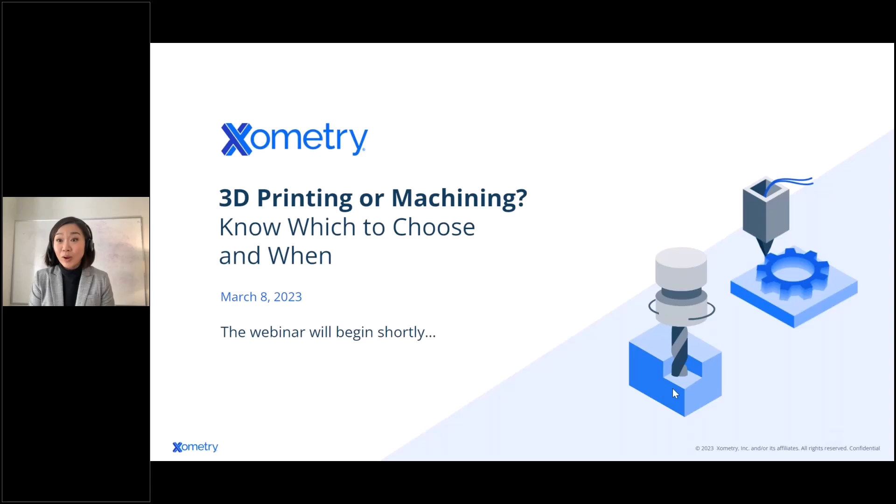We'll talk about 3D printing or machining, and let's go through our agenda. To start with, Greg and I will introduce ourselves, and then we'll talk just a little bit about Xometry, so you know where we got our expertise and experience. But we'll jump right in and give you an overview of CNC machining as well as 3D printing.

Between the two, Greg will give you some really interesting insights about subtractive versus additive manufacturing and the trade-offs of each. Then he's going to go through 3D design paradigm shifts, as he has over a decade of experience, and he'll tell you a little bit more about what has been introduced into the technology of material science and processing options.

We'll also talk about cost drivers, because some of you might be engineers, but some of you might be supply chain folks who have to watch your P&L closely, as well as optimizing your long tail spend. Then we're going to do a recap and a Q&A at the end.

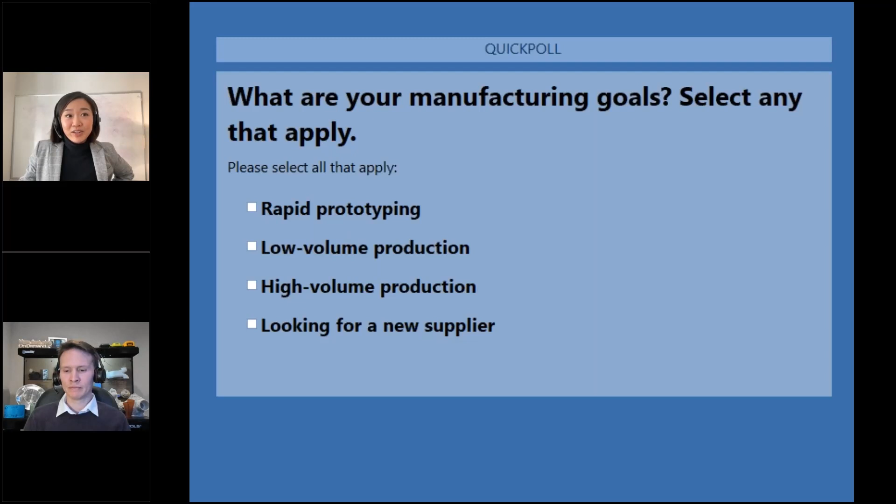It's great, over 70%. Over 75 now. Nice, perfect. So I'm going to show the results in 3, 2, 1.

Very interesting, Greg. Look at this. So 70% are looking into rapid prototyping and low volume production, about 25% on high volume production, and 21% looking for a new supplier.

No, that's awesome to hear, and it's something I always say: when you're working with these technologies, you can serve a customer of one. So a production, end-use production item can still be a low volume. I used to use an analogy when we talked about working in commercial flight, for instance. If you have one part on 100% of these commercial aircraft, you may still be making less than 500 pieces, but they absolutely need to be qualified. They absolutely need to hit the spec, and you need to check off all those boxes.

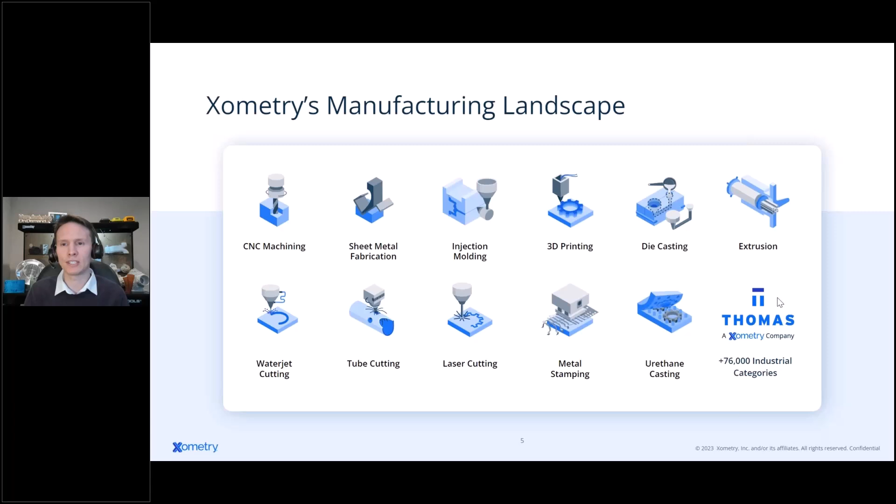So depending on what you're looking for, we have a lot of different solutions here at Xometry. And like I said, we are very manufacturing agnostic. Xometry offers about 20 different manufacturing processes. So when we're looking at different projects, we're able to think about not just what we have, because we have everything, but the strengths and trade-offs, what's going to bring the most project success.

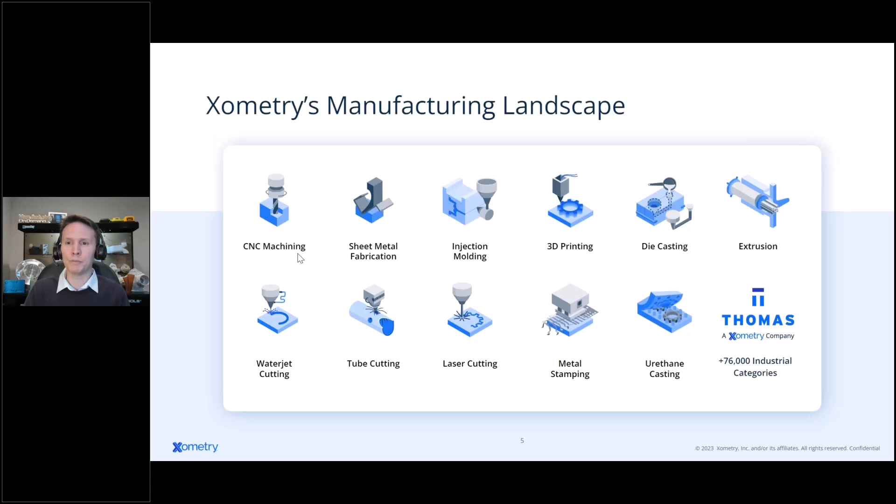Some of the highlights here, obviously today we only got an hour. We're going to be talking about CNC machining and 3D printing, narrowing down that scope. But we also have formative processes like sheet metal fabrication, injection molding, die casting, extrusion, as well as other ways to bridge that gap, whether it's laser and tube cutting or urethane casting. We have expertise, and we have a tremendously valuable tool to help you get that sourced readily and on time.

So let's just talk a little bit about Xometry. I'm going to go through this pretty quickly because we have so much content to cover today. But I do want to give you context on where we are and what makes us a little bit different than just a direct manufacturer.

Xometry is a digital manufacturing marketplace. We were founded in late 2013, really started making parts for our customers in 2014, and have grown and grown and grown since then. As a marketplace, we work both with buyers, those who need stuff made, as well as suppliers, those able to create those parts, whether it's a tool and die company, a 3D printing company, or machine shops. We have a platform that helps bridge that gap. We serve over 30,000 customers, and our global network, which started domestically but now has expanded globally, is over 10,000 suppliers.

Adding to that, a little over a year ago, Xometry actually acquired and brought in Thomasnet, which I've been very excited about because it helps fulfill this goal we have, where we want to be the first place you go to get something made. Because we have our direct offerings through Xometry's digital manufacturing marketplace, and we also have the Thomas listing, which adds a little bit more, maybe about 500,000 more suppliers, and over 76,000 manufacturing categories throughout that. So we just want to be a tremendous resource for you when it comes to manufacturing.

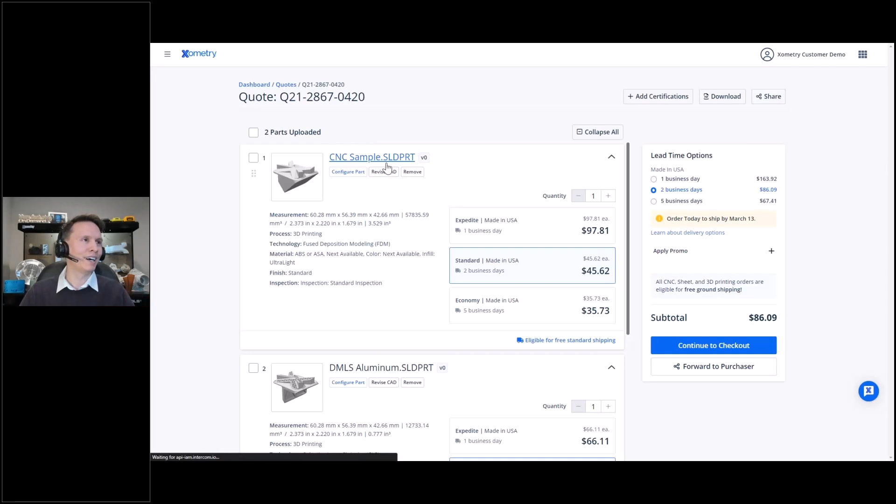In this case, I've added a couple parts here. It's defaulted to what it thinks these may be designed for, so it's pretty close, because one of these is going to have more complexity. So it's looking at selective laser sintering, which is a good value of that complexity plus cost, which is a 3D printing process. The CNC sample is going towards actually a 3D printing example because it could be either way.

But you can see here, I can quickly say, hey, let's take a look at this price for CNC machining. Again, this is live on Xometry's website. I can click, change my process in a click of a button. I can move to a variety of materials.

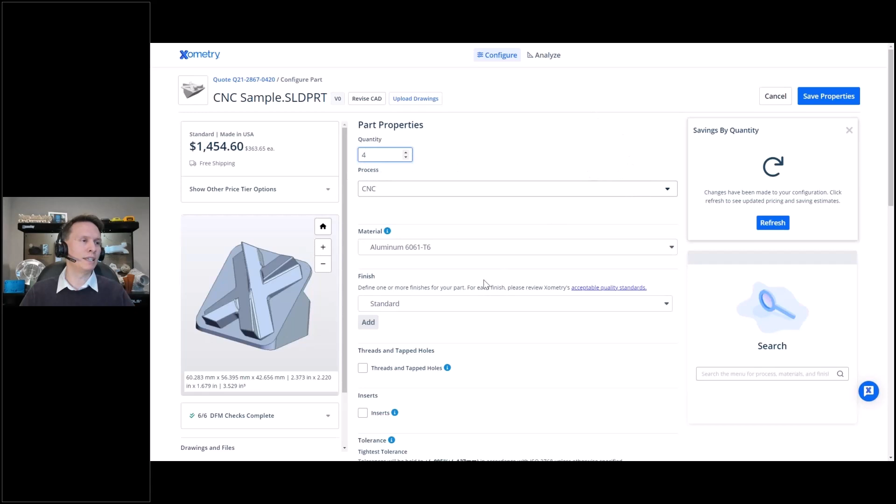You can see just how many materials we have offered here. And if you don't see what you're looking for, you can just click other and write it in, and our team will be able to look at it, review, and update that quote. You can see pricing and lead time update automatically as you're increasing your quantities and editing more features or finishes on your part.

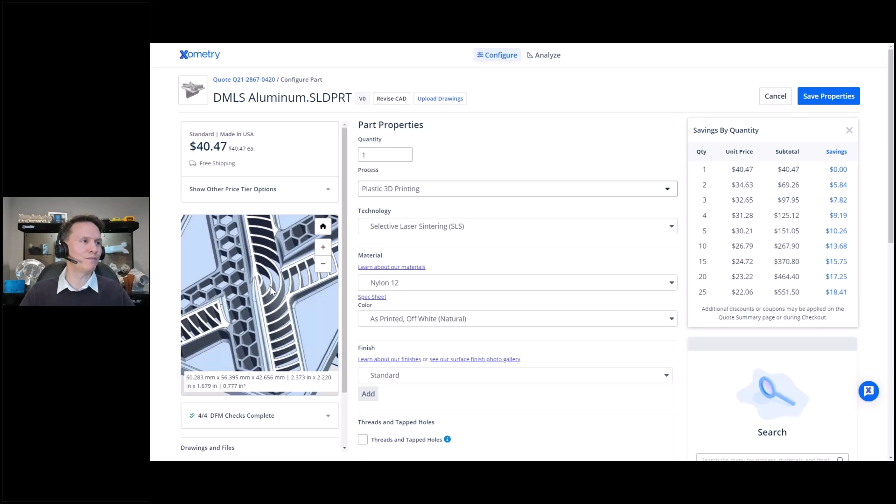The same thing goes for this one here, if I'm looking to move this to, for example, a 3D printed aluminum piece. I actually just printed out some of these pieces recently. They came out fantastic, but you can see some of these features, and we're going to talk about why I can 3D print those in just a moment.

I can move very quickly to a process like metal 3D printing, direct metal laser sintering, aluminum, and you're going to see that price bump, but that's something you get feedback right away with. So I really wanted to show you what that looks like when you're looking at the Instant Quoting Engine, and what we really mean by automating the procurement process, becoming the digital manufacturing marketplace.

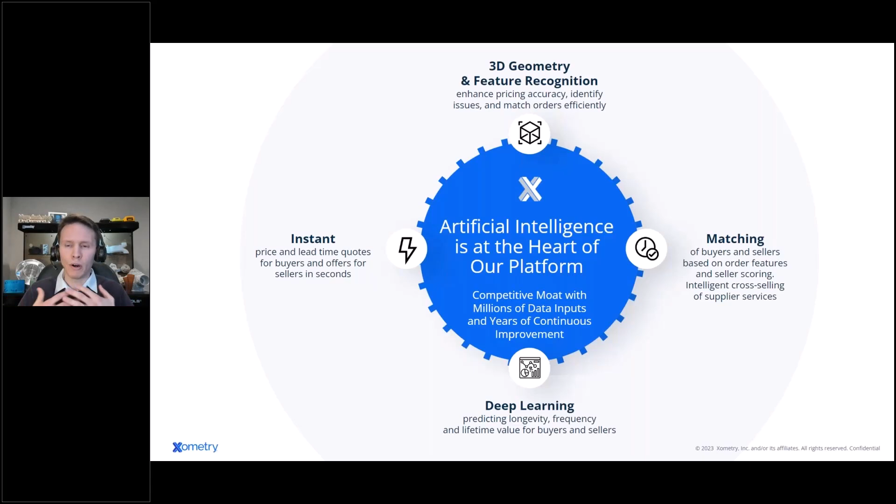We're able to bridge that gap, get you very quick quotes. We use 3D models to actually recognize features. And even as you set that project up, when you press buy, we use our vetted manufacturing network and use AI and machine learning to match make as well. So the heart of our platform is this AI and machine learning and deep learning tool that we have.

I'm going to take a break because now it's time to actually talk about CNC machining and 3D printing. So we're going to go into the bulk of this, and I really want to start with what we know, the stuff around us and these paradigms that we have, where you may not realize it or not, but you probably already have a paradigm in mind about what manufacturing is.

I'm reversing really quickly here because I did miss my slide. When I'm looking between CNC machining and 3D printing, these are the kind of top reasons I may go one design direction or another, and it has to do with those requirements. So we have those hard R's, requirements, and those soft D's, desirements. What's the requirement, what's the desirement as I'm producing my parts?

A lot of these have to do with the physical nature. So surface finishes, tolerances, how tight do I need measurement features and repeatability on my project? Cost is something that's huge and depends on the volume, the lead time, and other value factors.

Materials availability is a big one. The size of those parts, especially when we start talking 3D printing, you may find some limitations as you move up to a larger scale. And then throughput: how many do you need now, how many do you need each year? That may be a very different conversation when we talk about the choices we make between 3D printing and CNC machining.

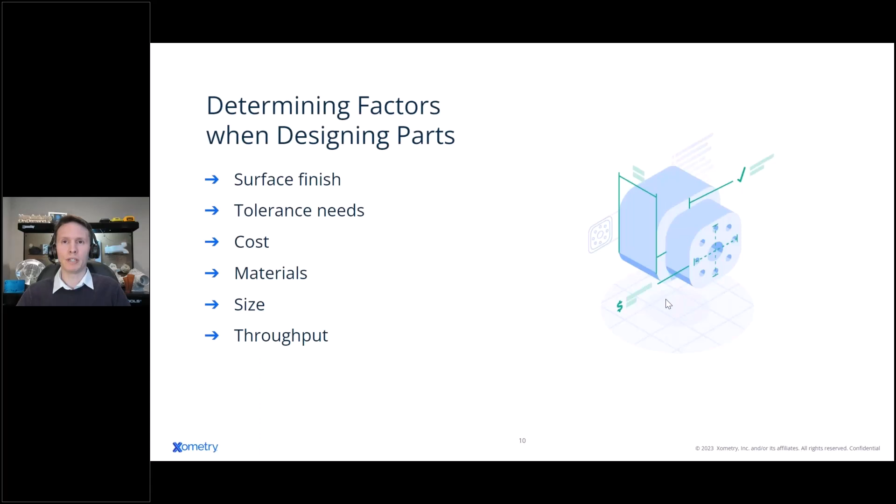So now let's talk about paradigms. If you look in front of you, if you look at your keyboard keys, if you look at the parts that you have—metal pieces, parts of your desk, doorknobs, etc.—they've probably all been produced in what I'm classifying as traditional manufacturing, or very close tertiary to that.

When we talk about traditional manufacturing, the base approach usually starts with something larger and then reduces it down to a final shape. So you're starting with a net blank of some sort and reducing it to the shape of the final part you're using. The most common example, and what we're going to discuss a lot today, is CNC machining—I have that net material and I'm removing it down using tools to reduce it to the final shape of my product.

And the stuff we see around us that's into high volume production, like injection mold parts and die cast metal pieces, they also fall in the same paradigm of subtractive, because the tools that made those things are also CNC machined.

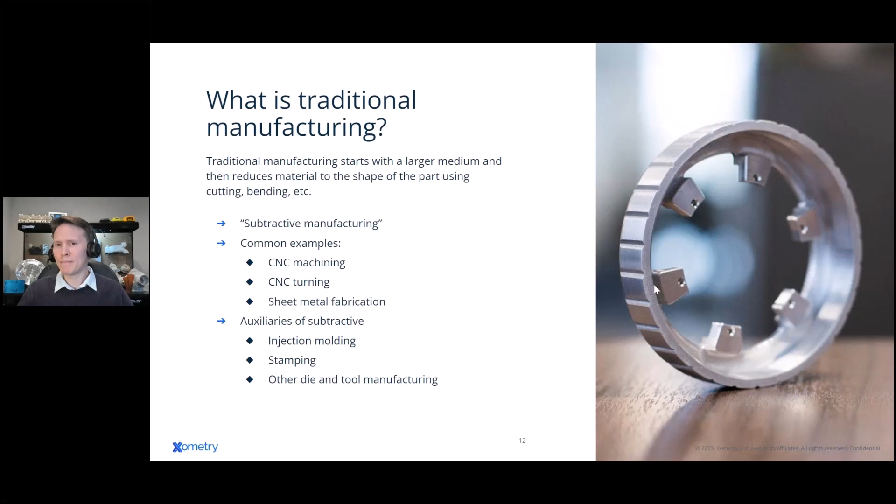What that means is we're kind of used to seeing certain aspects of CNC machining, and we may not even realize that that's our paradigm and that's our normal. That smooth surface finish from CNC machining comes from an end mill, a cutting tool, producing features of a part.

With a CNC machine, you are using a block of material, say it's aluminum or raw material. It is held inside this machine that can move that material around against an end mill, which typically has vertical movement in a 3-axis machine, but can also have secondary movements. That end mill is almost like a drill bit, and it can be a drill, but usually an end mill has a flat feature to it, able to cut on the side as well as cut down into your part.

As it plunges into the part, which may be moving underneath it, it creates features and pockets, edges, and other features on that part. As it's cutting, it leaves a pretty smooth surface finish, typically 125 microinches RA. When you look around the parts behind me, the CNC machine parts, it's something we expect because it's something we know. It's our paradigm of what a typical manufactured part looks like because it's been tried and true for such a long time. There are design considerations.

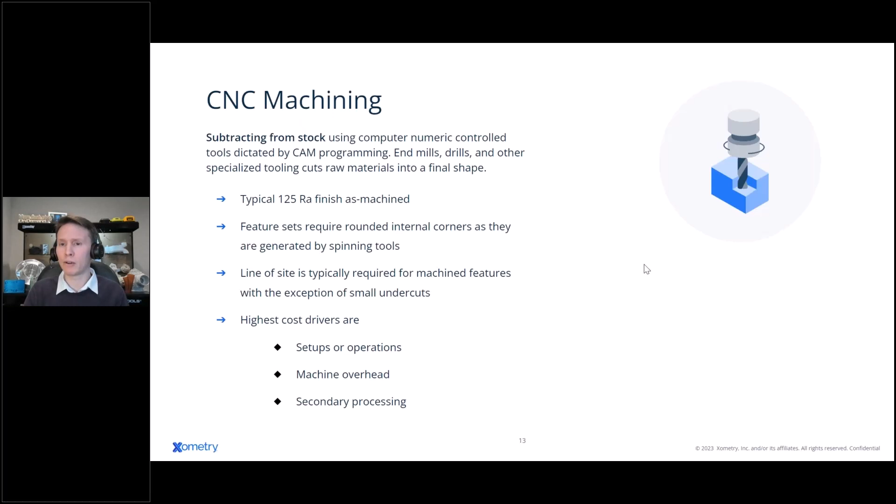Ultimately, CNC machining does have secondary processes to it. So if you need to add a finish like an anodize, a plating, chem film, or powder coat, all that can add incremental costs as well.

But like I said, it's what we know. CNC machining is pretty awesome. It is a tool that is highly versatile because we have gone to college about it. We have learned through generations and generations of practical knowledge and documentation, metallurgy, qualifications, ASTM standards around these materials and the processes used to make these machine components.

Also, I can do some things with the machine that are really cool, like I could stop and slow down and measure, doing in-process incremental changes to hit very tight tolerances on my part against a technical print or requirement. But that characterization of materials is just so important, because when I'm working on a machined part in industry, I don't even think twice about buying a certain material like 6061 from dozens of vendors, because we know that material has been so tried and true that as long as you're buying from a reputable vendor, you're going to get the same results every single time.

As an engineer, you may be just assuming the mechanical properties within that material, and then you're designing your shape around that, where it can be a little bit different with other manufacturing processes. But that established track record just works really well in machining's favor, and it brings consistency, reliability, and predictability that is very critical for a lot of industries.

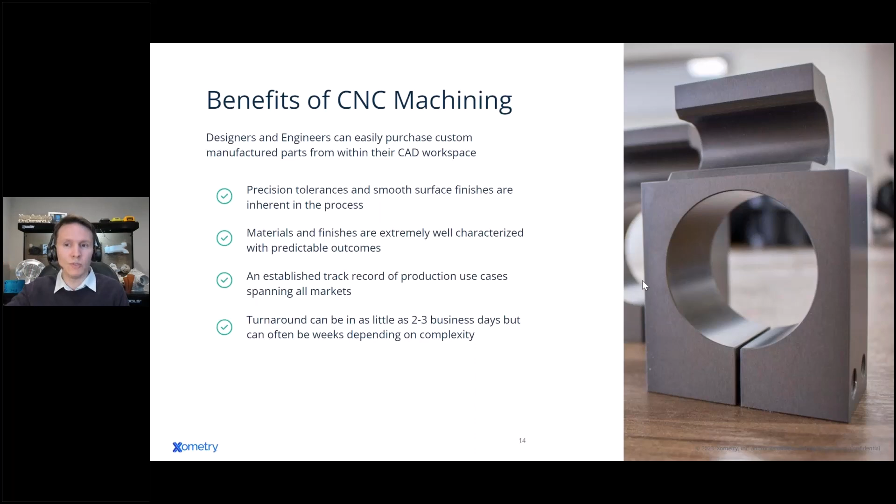And turnaround can be pretty quick. As a service, we usually start about 2 to 3 business days on smaller parts. If you're running internal, obviously you can push a little bit further. And then the more complex the part, the more finishes, the higher throughput needs, you see that movement into lead times into the weeks or so.

But if I'm a company like Phase 4 Aerospace, CNC machining may be exactly what I need. If I'm building micropropulsion units, parts that are designed for space flight, you really need to have a high level of confidence and predictability on the outcomes you have. There is no 'let's bring it to the repair later' moment when you launch something into space.

And this is exactly why a company like Phase 4 may have a hard requirement for machine components throughout their design. So in this case, they were working on a new electrical propulsion system. They chose Xometry because we were able to manufacture these parts to their specifications, including building a documentation chain from the traceability of that material all the way up to the manufacture and finishing of that material. We are also, as Xometry, ISO 9001 as well as AS 9100 certified for aerospace manufacturing, and we're able to extend that throughout our network to hit those requirements, as well as any security or certification needs.

But we help them cut their manufacturing costs by becoming a consolidated supply chain for these components, and hit all these specific needs that a company in high-end aerospace has, especially when they're doing a product launch where they need to move industry fast. So this new space industry just needs to keep on moving, keep on developing, and keep on pushing the limits. Machining helps take some of that guesswork away.

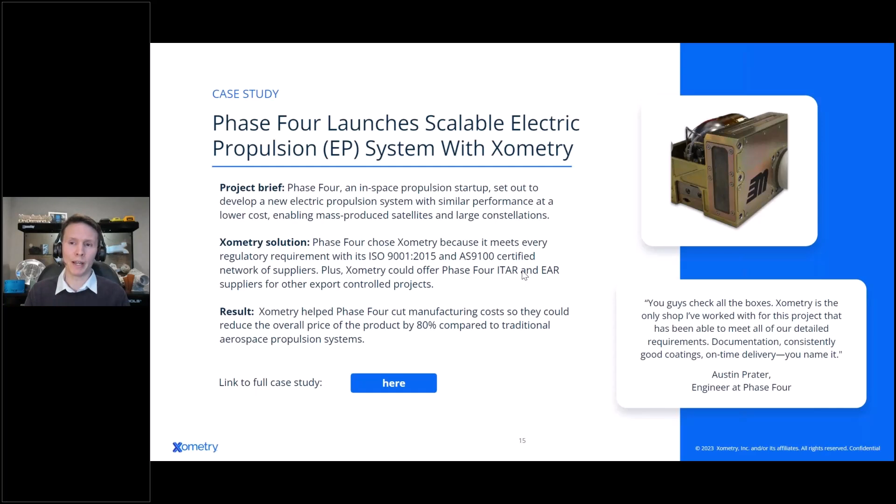Now, switching that around, machining is what we know. We have this idea of what a machine part looks like, should look like, and this idea of workmanship throughout it. But 3D printing is a little bit different. 3D printing or additive manufacturing is this process of growing parts. It's typically done layer by layer, and you're joining materials together, either fusing them with heat or a chemical reaction, or sometimes a secondary fusion process.

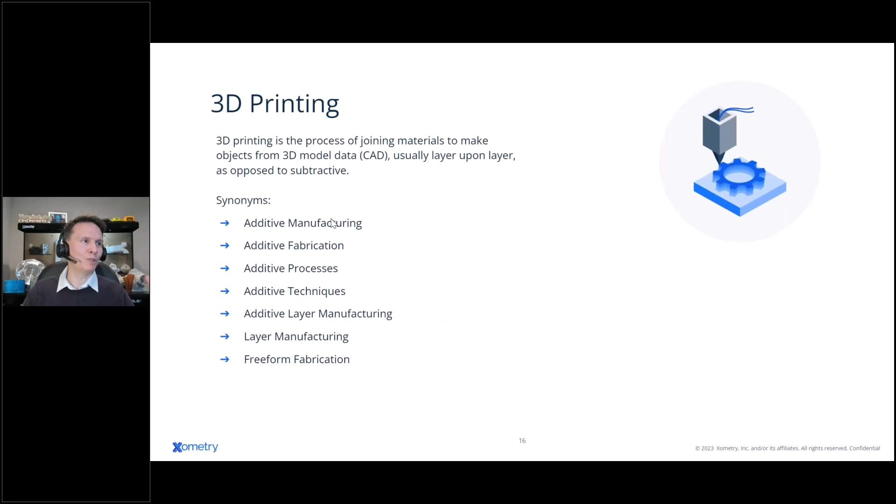And it's doing this all dictated based on a 3D CAD model. So unlike subtractive, where you're starting off with a chunk of stuff and reducing it down to the final shape, 3D printing starts with an amorphous material, a filament or powder or liquid, and it is fusing or curing it into the final shape, kind of growing from the bottom to the top. So it has a much more organic approach to manufacturing. I will say nowadays, mostly additive manufacturing and 3D printing are what we're using in the industry though.

But additive manufacturing is a landscape. It's not just one machine doing it all. We have different ways of making 3D printed parts, as well as different outcomes, so different material classes.

Xometry offers 8 unique additive manufacturing technologies and counting, including ways to make thermoplastic parts. So when I think thermoplastic, think about what you get out of injection molded materials, so nylons, ABSs, polycarbonates. We're able to print directly in those materials. So our top picks are going to be selective laser sintering and multi-jet fusion for their high versatility. FDM, fused deposition modeling, that's the one that uses that reel filament of material to produce parts. It's very good for those boutique builds. I need a green ABS part, or I need a white polycarbonate part, or a black Ultem part. You're able to just specifically say that's what I need and print in that.

We also have engineered thermosets, so these photopolymers that are liquid based.

Three technologies offered through here. So stereolithography, which is one of the oldest 3D printing methods, was invented in the mid-80s, and it's just developed and really skyrocketed from there. And by the way, we're seeing a photopolymer revolution right now in the industry, which is really exciting.

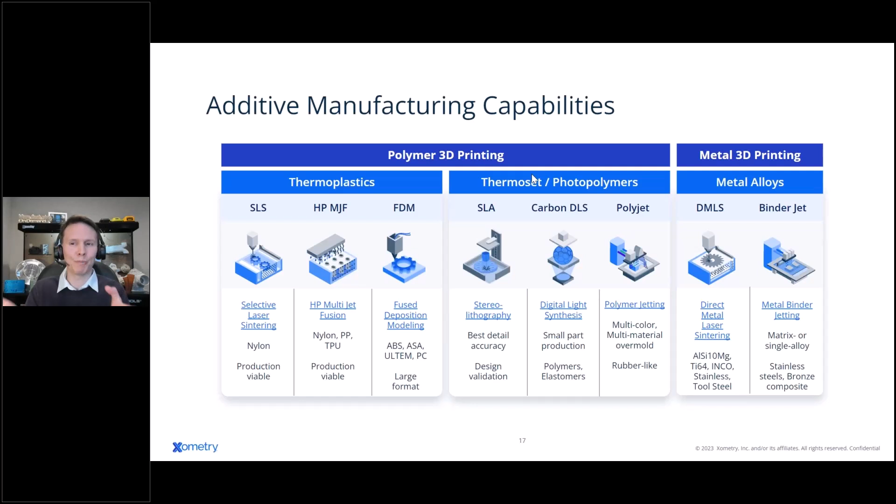Metal 3D printing, we have a couple options like direct metal laser sintering and binder jet metal. They are very different on how they're producing, but ultimately you get metal parts. Binder jet has some secondary post-furnace processes. It starts with a green shape held together with a glue binder, and then it has a secondary process where the part may shrink and move around a little bit, but it gives you more of an option for higher volume production than DMLS, where the parts are typically sintered to a build plate.

And all these processes are industrial. So industrial 3D printing is something that is designed to work in environments such as what we're doing with the service—we're always running these machines, they're always cranking out parts. They need to be very reliable and very repeatable for someone like you, who could be a customer, where you're ordering a part today, and then say you want to order 30 or 300 three months from now, you're going to have that high level of repeatability.

Hey, David asked a really good question—we're just chatting on the side. Greg, can you mix and match the 3D printing processes, or are they all separate?

Yeah, that's a great question. So these processes act independently, almost like a vertical in how they're actually manufacturing the parts. The base nature of how these parts are being created comes from the machine up. You can do things like multi-material 3D printing within PolyJet, for example, where you're mixing colors or different material properties in a matrix, so you could get kind of a simulated overmold or something like that.

But for example, if I'm doing an SLS nylon 3D print and I want to have some aluminum on that, that would be a post-assembly operation. You wouldn't necessarily have the capability to mix both of those together. There's a lot of reasons why—dissimilar materials science, the bonding, the heat and thermal properties of it, the machine characteristics can become very, very tricky there.

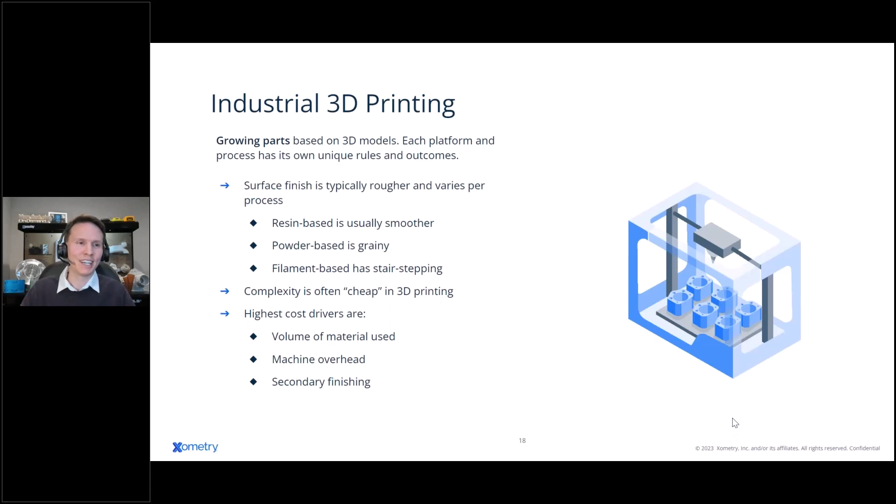That being said, when we're talking about the benefits of 3D printing, it really just wins the low volume game. It's such a powerful tool for rapid prototyping and low volume production, because that talent—we talked about CNC machining—that talent is in the operator. With 3D printing, a lot of the talent is in the machine.

What I mean is we have some really talented staff that are doing build setups and programming and that digital setup for 3D printers. But they're able to do that and scale up to dozens of machines per operator. So you could have a small nucleus of talent able to produce a lot of parts, thousands of parts per month, with build setups and this digital programming. It makes it very quick to add a digital file. Your build setup program is doing a lot of work for you and translating that information to the 3D printer, where the 3D printer is going to do its best to reproduce that shape using the process and its parameters.

You could have one-day turns with 3D printing, even on a service level. It's not uncommon for us to get an order and build it overnight, ship it out the next day. Even some of the more complex parts can only take a few business days to produce.

What's really great and unique about 3D printing is this function orientation. With CNC machining, if I have to pay for that spindle to turn around and mill out parts, I may be designing in a way just to reduce the amount of time that's working. So if I have a bracket, I may leave it quasi over-engineered—if I just need these functional features, I'm only going to reduce the material there and leave the rest in a block shape. With 3D printing, the work's only when it's depositing material, so I could put that part on a diet and instead talk about function first in my design.

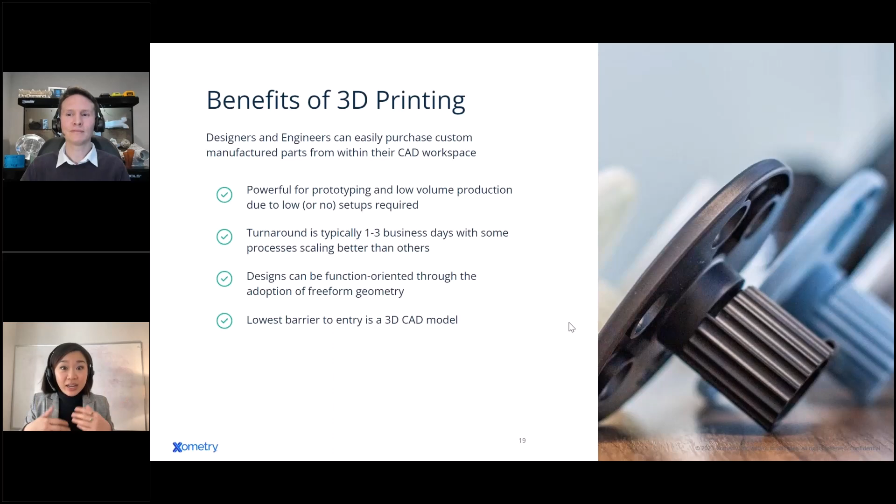No, absolutely. At Xometry, we do have expertise in manufacturing in-house as well as throughout our global network. By far, the vast majority of parts are done with our vetted partner and supplier network, and we rate them just as much, the same as we rate our internal capacity. So we do have some polymer 3D printing capacity and a nice little factory out closer to where I am, in the Gaithersburg, Maryland area. And a lot of our team comes from actually running our own facilities in the past, our own machine shops, molding services, tool and die services. So what's really great about Xometry as far as our staff goes is, we love this business. We are just so incredibly passionate about what we do and the parts that we make. And we're also able to work with our suppliers. They have their own vetting processes. We have partner success score and feedback, and we also want to have stake in the game with them. So if there's anything where we need a strategic approach to producing those parts or working through our troubleshooting, our team's first in line to help with outcomes and success there.

And speaking of that, I have this case study kind of showing where additive manufacturing plays a really nice role.

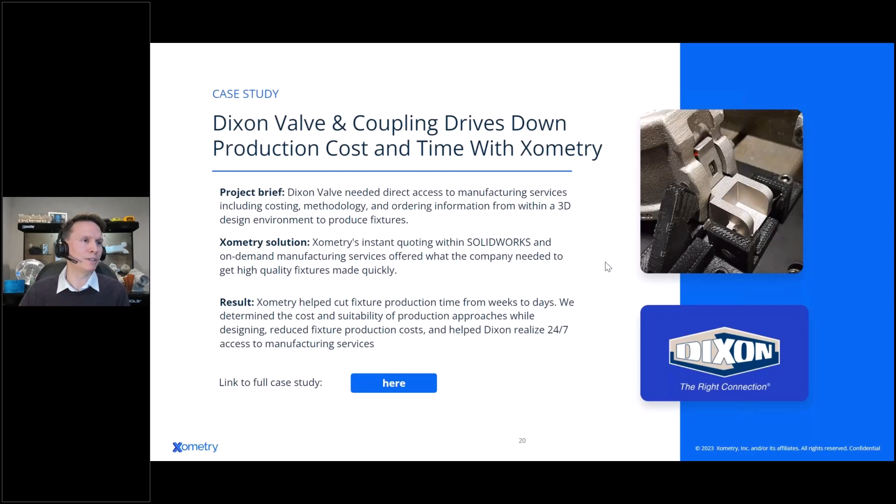So I'm going to dive a little bit more into 3D printing, since some questions are coming in, and I think this will help as we talk about design paradigms, because it is a little bit interesting. I dive into 3D printing more than CNC for this session, because it's not what we know sometimes. It's something we're learning about, and I want to spend time talking about these different paradigms that you have.

The first is growing. When I talk about manufacturing and 3D printing, I say we're going to grow this part. That's because that's what it really looks like when it's being built, starting from the bottom, moving up to the top on a layer by layer basis. It also means there are little nuances that happen on a part. For example, this piece here where you have a horizontal hole, that hole may have a slightly different look than a drilled hole because of the layers of that part.

So when we start thinking about growing, all of a sudden in our design process we also may be thinking about orientation as part of our mental flow in designing.

The other thing that's super important when comparing CNC machining versus 3D printing is that 3D printers make net shapes. The tolerances, scale and offset, are actually applied at the machine level. So this material on this machine with this parameter set will give you this type of result. When we talk about tolerances, it's usually in the plus or minus range, plus or minus 5 thousandths, 10 thousandths, or 12 thousandths per inch, whichever is greater, is what you'll see a lot when you look at Xometry's online manufacturing standards.

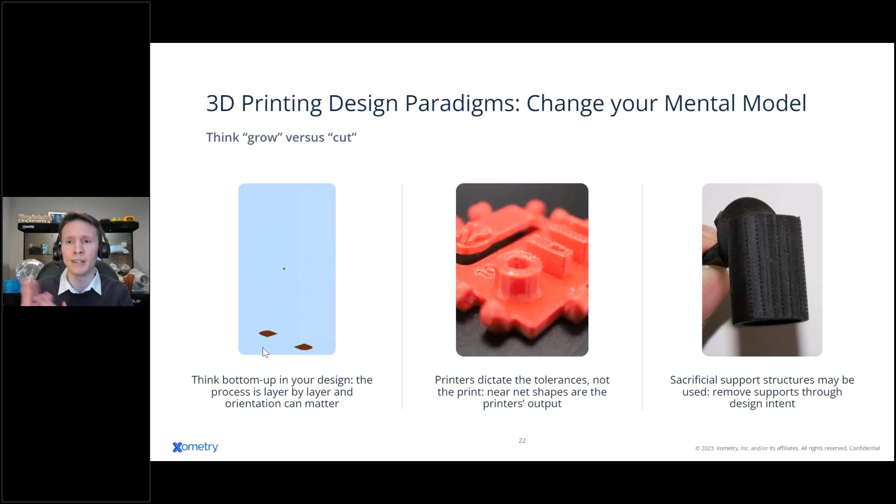And I say that trying to mitigate any secondary operations like post-machining, for example. So we've talked a little bit about these paradigms, and as I said, CNC machining is not necessarily one size fits all, but one process fits many.

With additive manufacturing, you have these multiple processes. So how do I choose? I want to spend a minute or two talking about platform selection here, because the first question I always have for a customer is, what is your goal?

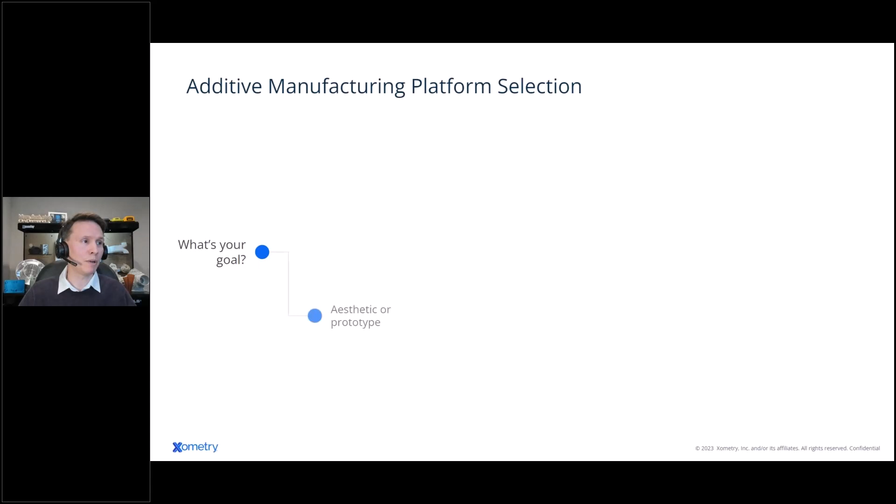And this can change depending on where you are in your product development life cycle. So if you're looking for the next couple of weeks, maybe it's prototyping, like a concept model, needing to hit an aesthetic goal or a prototype. Very quickly, we can start down-selecting a process that can work for you. Could it be low cost? Can it be fast? How can it achieve your goals? If you just want shape really quickly, that's going to hit 90% of your needs—FDM, SLS, MJF, like those major technologies may just be perfect for you.

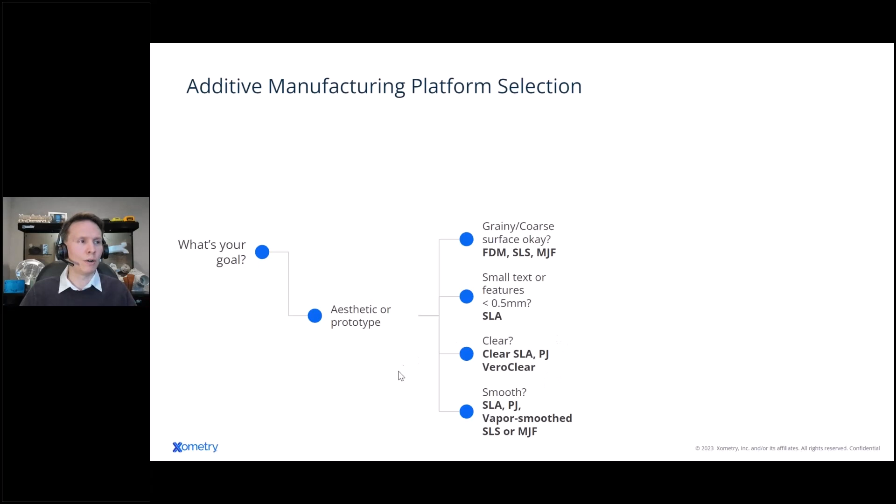But let's say you're moving towards something that needs finer detail, or clear, or more of a smooth surface finish—that's where you find stereolithography. These liquid resin processes tend to work really well. I have a picture here of a part where you can print parts that are clear, ice cube clear, with our quick clear finish. Here's an example of something where I'm printing a part that has a cosmetic need—it needs to be clear, and this is an auto-coatable feature. So this is SLA Accura ClearVue with a quick clear finish.

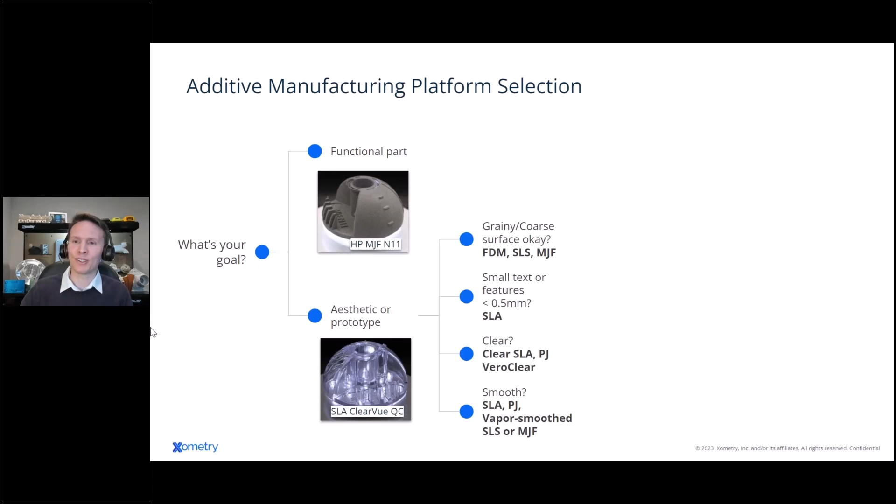But that's one outcome for a prototype or concept, bringing me to the next phase of my product development cycle. Now say you're looking for something that's end use—it's going to be installed, I'm going to use it, and I hope to forget about it. I hope it just works, and that's it, right? That's where we start looking at functional parts, and this could also be used as a surrogate for testing as you're bridging into production.

But we have many options under this functional branch. With metals, it's a quick down-select with only a couple options. Non-metals, we have many more options available for additive manufacturing. So my next down-select may be, is it a metal, and is it a rubber-like material? We have three 3D printing processes that can produce rubber-like materials, including thermoplastic urethane from MJF, which is very popular. DLS has a TPU and a silicone-based urethane, and then PolyJet can simulate durometer, kind of squish-like features, within its technology on demand.

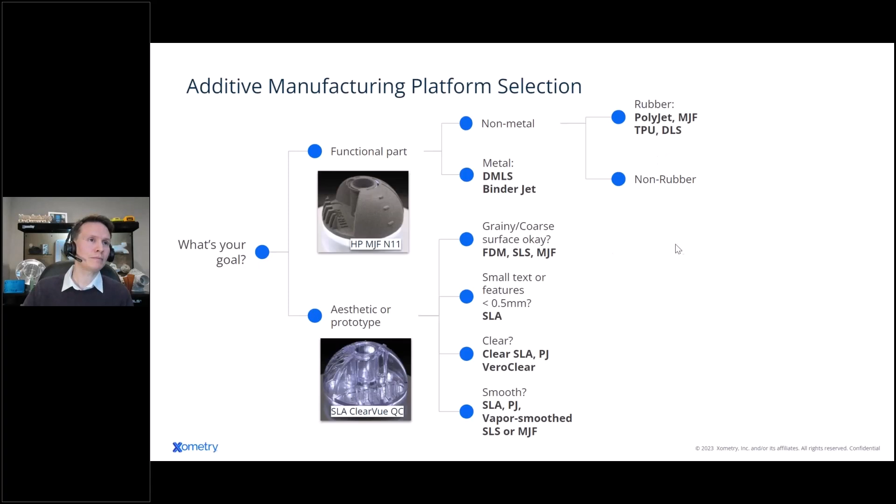If I have more demanding environmental requirements, I may be looking at some of these thermoplastics. For impact resistance, we have a lot of materials, including nylons, that are very good for impact resistant designs, especially a material like nylon 11, which has much higher ductility than a lot of stiffer materials like polycarbonate, and works very well there. In this case, I have a picture of Ultem 9085, which hits heat deflection and actually a lot of chemical resistance—it's a very high-end thermoplastic you could directly print in. Some of our other questions may be chemical resistance or sterilization, but we can help narrow down our process and sometimes a direct material with this type of decision tree.

The last thing, if you're choosing between CNC and 3D printing, is that the size of your design can play a huge role. If you're trying to make a car hood, we may need to split and bond, or look at other processes to produce and fabricate that.

Fused deposition modeling can print up to 36 inches with our current offerings. We do have some abilities to print larger, but from an instant quoting standpoint, that's what we have. So we have a 36 by 24 by 36 inch build platform in our Fortus 900 FDM machines.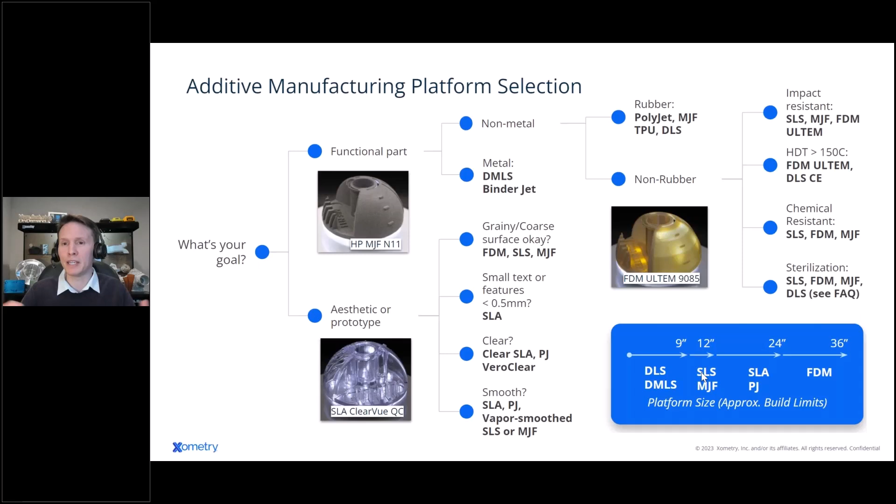The smaller you get, the more options are available. Below 12 inches or so, you have a lot more optionality. Once you get above that, you reduce the types of 3D printing available. That potentially reduces the material selection, and the larger you get, the more coarse some of your feature sets may be. It's just something to consider - this is a lot to take in, but I wanted to give you a glimpse into some of these tech choices we make when choosing additive manufacturing platforms.

Pictures are always nice here, so I want to show the layer lines you see with a fused deposition modeling - that's from the filament. A filament-based 3D printing method gives you that filament-like finish. Liquid-based 3D printing, like resin-based stereolithography, gives you a smoother finish. Powder bed 3D printing processes, where the base material is a powder, give you more of a powder or sugar cube-like finish. Unlike CNC machining where you're removing material, because you're adding material up, the surface finish reflects essentially that base material without secondary processing.

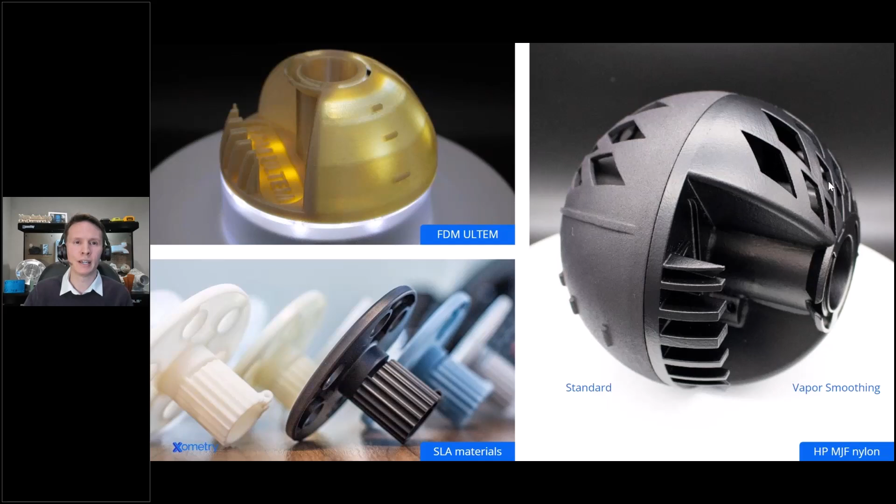In contrast, this is a chemical vapor smooth finish of the exact same model. They're just kind of joined together here, and you can see that we can add secondary processes to smooth out parts.

And that's when it comes to comparing cost drivers. This is kind of our last big section here when talking about choosing between processes, but sometimes it just comes down to cost. What makes the most sense for my product development? What's my total estimated volume, and what's going to save me the most money or bring me to the level of sustainment that I need.

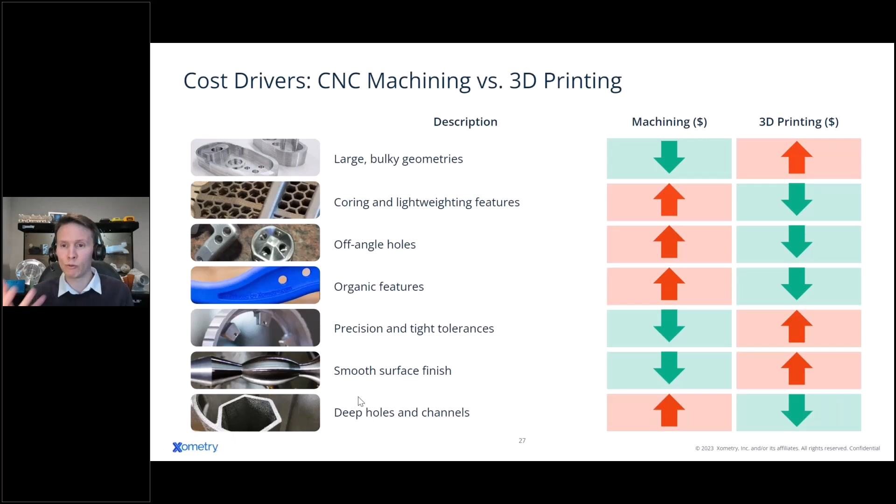And last but not least, deep holes and channels. If you look at these beautiful additive manufactured conformal cooled tool designs for injection mold inserts, they have this ability to add curvature and channels within. Or if you have a very deep pocket, especially something like a deep pocket with a hex shape, you may not even have the tooling to produce that feature, or it may require a lot of specialized requirements including wire EDM, which could dramatically raise costs. 3D printing is cheap because it just doesn't print there - it's just making the rest of the part. So in a lot of ways, when you're doing this coring or material removal, it's a cost reduction technique for 3D printing.

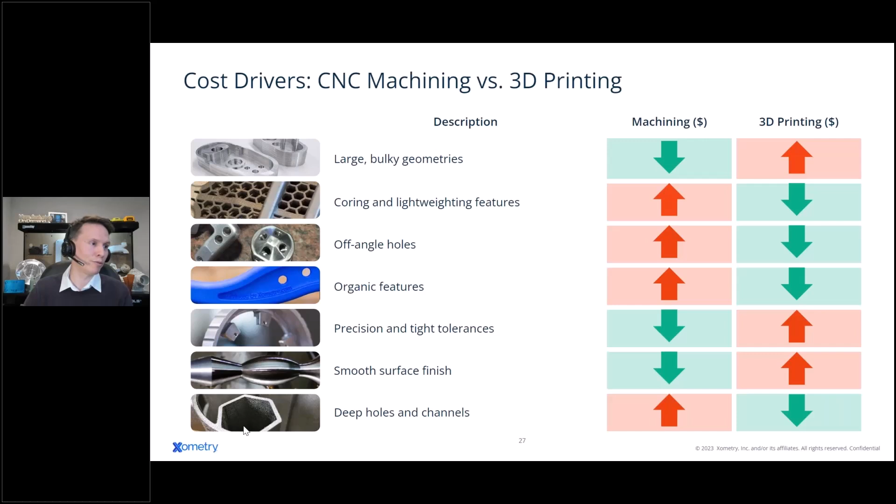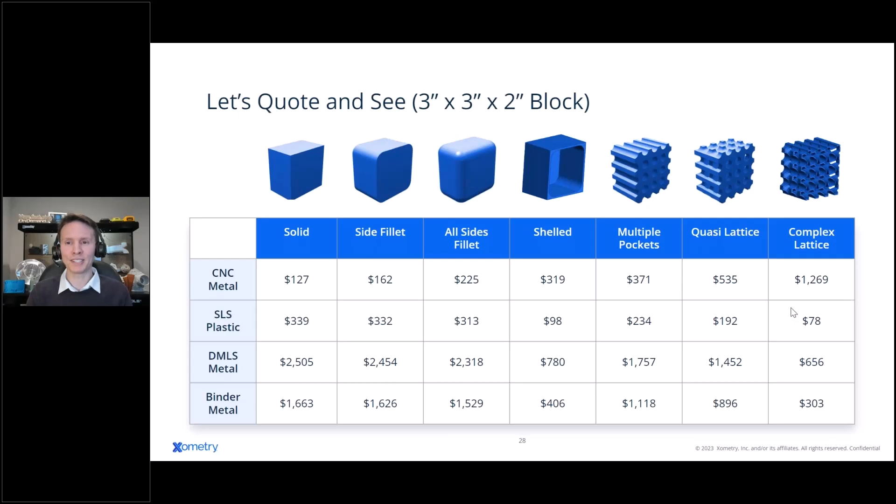And just to seal this up, when talking about costs, I ran this through our instant quoting engine. This shows a part that's increasing in complexity. Moving through with machining, you're starting with just overhead to mill and plane the 6 faces of this part. But when you're printing bricks, you're paying for that material, you're paying for that work to occur. As you start removing material, you start seeing the 3D printing methods getting less expensive, including this one where it's just shelled and cored - you can see that dramatic price drop because it's less work to produce those. But you're adding complexity if you're removing material, so as complexity rises in the design, pricing will rise on the CNC component. CNC machining probably could not make this design, but just for the heck of it I put a price in, though there'd be a lot of DFM callouts on our site if you actually tried to make this machinable. But you can see how it dramatically lowers pricing in a complex part, because volume is a huge factor versus complexity in pricing of additive manufactured components.

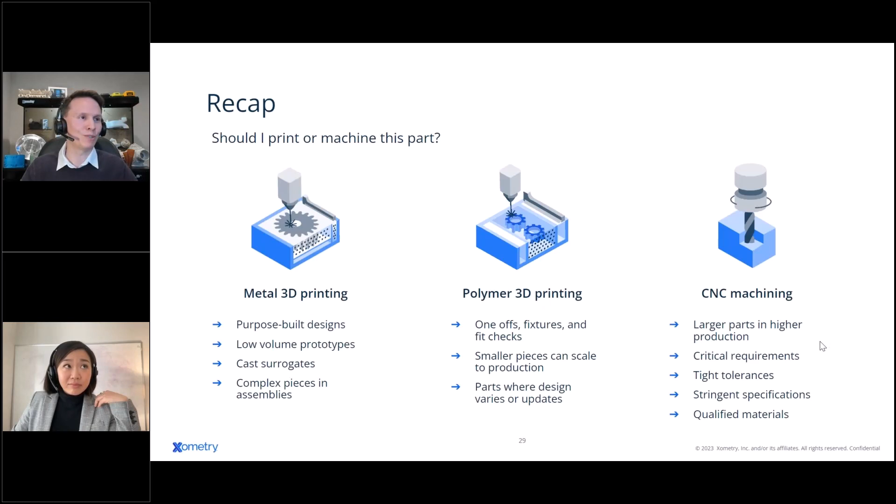With my last case study, I do want to highlight BMW because I think they do a fantastic job of combining both where CNC adds value as well as where 3D printing adds value in their tooling, jigs, and fixtures. We make a lot of jigs for their manufacturing plants at BMW.

These are typically lower volume, so no more than dozens usually, and it's used along the assembly line. They're using 3D printing for large conformal pieces that can be lightweighted by reducing the infill or creating cored features for handheld jigs and fixtures. That helps reduce fatigue and reduces scrap rate.

That being said, they're using CNC machining in traditional processes where they have extremely tight tolerance needs, because what they're using these fixtures for is installing components of that vehicle. Every single installation of that decal or that trim or that panel should be exactly the same place on every single vehicle. So a lot of times the components that are actually indicating on those features of the vehicle will be CNC machined.

So sometimes machined plastic like Delrin, sometimes machined metals like aluminum 6061. And I even love their parts because they color code them — you see really fun anodized colors with a lot of these BMW parts.

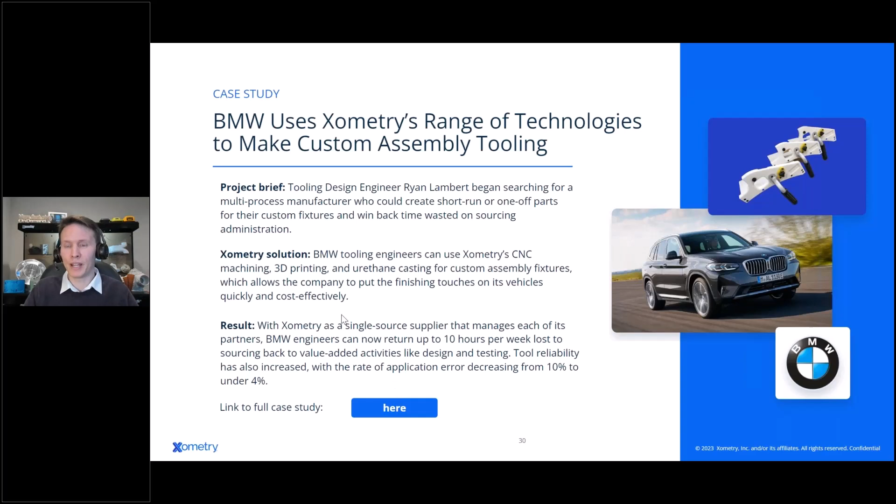And then the main body may be 3D printed, again, to give you that structure, give you that organic conformal shape to hit the edge of the vehicle and actually conform to it, as well as to make it lighter weight. So I really do love seeing a mixture in our orders, and that's something we have a superpower at Xometry for — using our quoting engine to just add your bill of materials and press buy.

So with that being said, get some more questions ready. I'm going to jump into this because I know we are running low on time here, but we really do bridge product development and production with 3D printing, so it's across the whole gamut of the process.